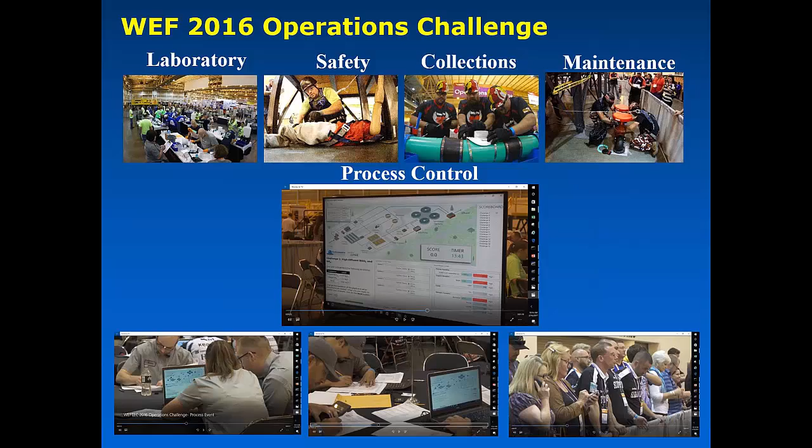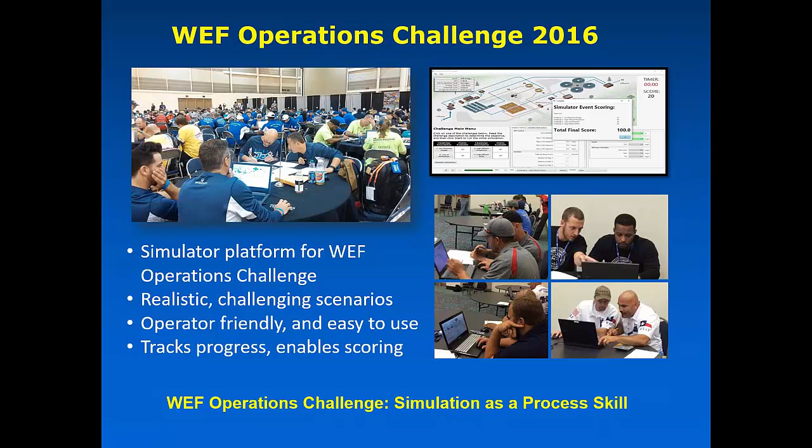So as we indicated earlier, the Operations Challenge event, the goal there, as the WEF committee presented it and as we've interpreted it, is not just to provide a simulator platform that allows us to have a realistic scenario in the Operations Challenge event. What we want to do, and will continue to strive to do, is make sure that those scenarios are as realistic and as challenging as possible. We continue to work on making sure that the simulator is operator friendly and easy to use. And again, we'll continue to solicit your feedback in terms of how you're engaging with the simulator.

So the first thing we'll do as we go forward is, for a number of you, the last time you worked with this was during the regional events last year. For those of you who made it to WEFTEC, you certainly worked with the simulator at WEFTEC. But what we'll do very quickly is have a very high-level overview of the simulator.

So when you open up the simulator, the key things that you will find is, first of all, the entire simulator itself, if you recall, is a clickable diagram. As you click on different objects, those objects will open up in this middle panel, and you will then be able to make any data input changes, any variable changes that you want. Item number 2 here is an operational summary. Every time you run the simulation, you'll be able to see the impact of any variable changes in this initial operational summary.

A number of you might notice that we have another additional operational summary in item number 3. What item number 2 does is it gives us things like the MLSS, the DO values, the total airflow, sludge production, and now we've introduced clarifier loadings, both the clarifier loading to the primary and the secondary clarifiers, and here we're talking about the hydraulic loading to the clarifiers. And then in the second operational summary, this is where we summarize things like SRT, the food to mass ratios, and the percentage removals of all the different loading variables. So percent BOD removal, percent total nitrogen removal, percent ammonia removal, and things of that nature.

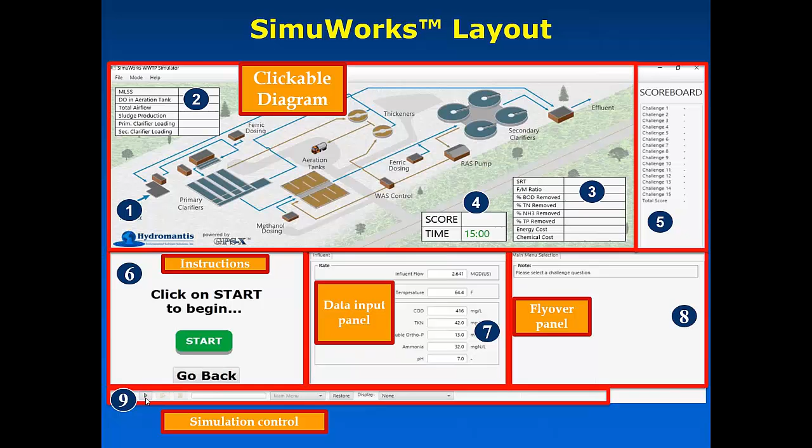So there are 4 quick things that we should recall and keep in mind as we go through the discussion. The first one is we have to click on any unit process that we're interested in on the plant diagram itself. Once we make that click, we can go in and make whatever parameter changes we're interested in making. And then once we've done that, we run by clicking on the start button in the bottom left of the simulator, and then we observe the results.

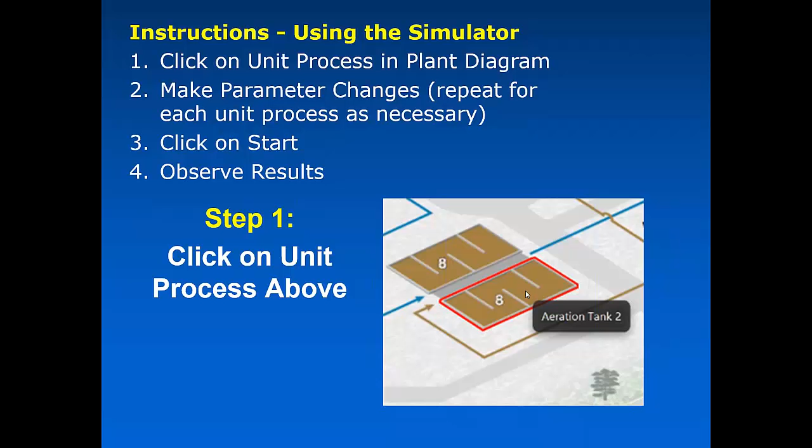So step 1, click on any unit process that we're interested in. Step number 2 is we go ahead and adjust the parameters of interest. So for example, in this case, we clicked on the aeration tank, and now we have the ability to go in and make changes to the DO controller, or we can utilize an airflow.

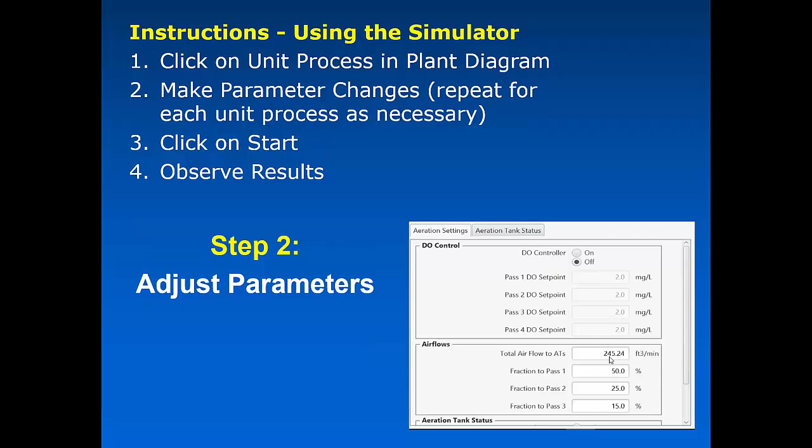And then step number 3, this is where we hit the start button and it runs the simulation. What it means is that every time we hit this run, it takes all the variable changes we've made. So if we change DO from 0 to 2, once we hit this button, it makes that change and allows us to incorporate that change into what is going on in the plant, and we then get results.

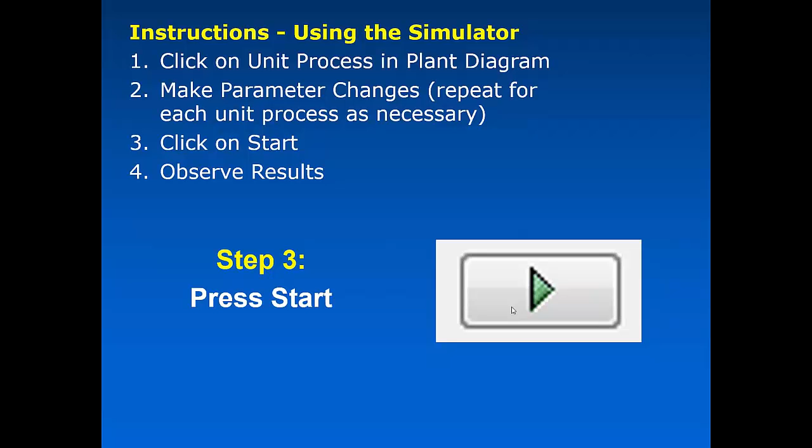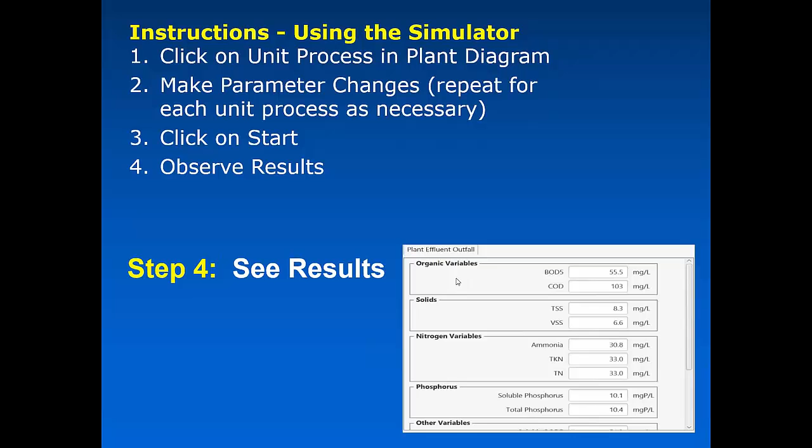And the final stage obviously is we can then see the results and determine whether those results are the things we're looking for. And if they are, then we're fine, we've met the challenge requirements. If they're not, it means we have to go through that process again in an iterative fashion.

So overall, there are about 15 questions that we had for the WEFTEC challenge. Those questions addressed a number of very different issues. So the first question was about a high effluent COD situation. It's a plant where we're not meeting the COD targets and we need to bring that into compliance.

There are questions like question number 3 that had to do with trying to meet a total Kjeldahl nitrogen, so a total organic nitrogen, which essentially means in most cases we have to do both nitrification and, as we will see in challenge number 3, we also had to think about some denitrification as well. And in the meantime, we have to do that in the context of trying to stay within an energy limit in terms of cost. There are questions that addressed issues of seasonality.

So question number 4 had to do with a cold weather type situation. There are questions around total phosphorus removal that would push us into considering things like chemically enhanced phosphorus removal in case the biological process was not sufficient.

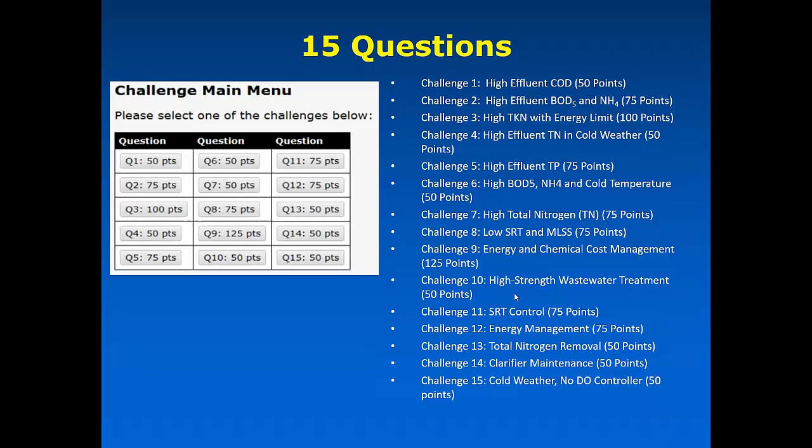There are questions around, like question number 9, where we're looking at the regulatory requirements, which is your BOD, your total nitrogen, your total phosphorus, but at the same time, this plant needed to also do all of that within the constraints of trying to meet specific energy and specific chemical cost management goals. So again, a variety of different types of challenges. Like challenge number 10, for example, this is one in which we're dealing with a high-strength wastewater, presumably a plant that has a pretreatment program where industrial facilities are discharging somewhat higher concentration wastewaters.

Before we go on, very quickly, one of the things we need to talk about as well is what the calculation basis is. So the MLSS that is reported in the simulator is actually the mixed liquor suspended solids from the effluent of the aeration tank. So if you look at the aeration tank, you will see that there are partitions. This aeration tank actually has 4 separate zones.

So this is the first pass, the second pass, the third pass, and the fourth pass. So the MLSS value is read from that fourth and final pass in the aeration tank. The SRT is defined as the total mass of solids in the bioreactor divided by the mass of waste-activated sludge. So this is where our WAS is coming from. So the total amount of wasted sludge in pounds per day is the denominator there, and then the total mass of solids in our aeration tank is the numerator. So that's the mass of solids.

The DO in the aeration tank is reported at the end of the aeration tank. So if we see a DO level of 2 up here, it would mean that's the DO level in the final zone. And as we go through, I will remind you of what we need to do if we were using, for example, the airflow rate, and we wanted to know what the implication of that airflow rate is for the DO levels in the different zones.

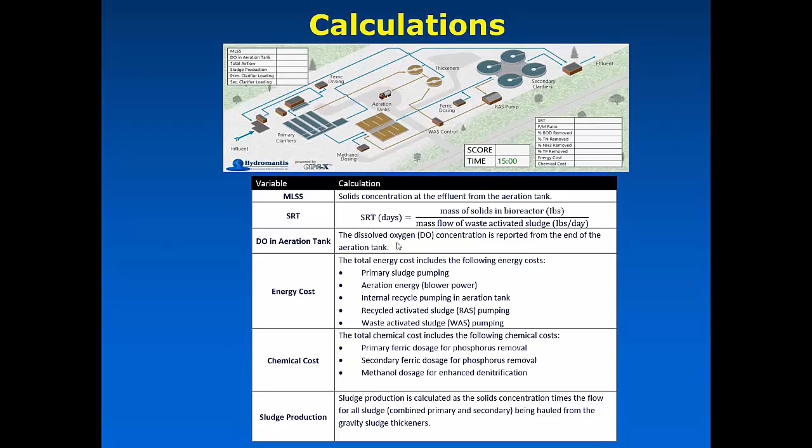Why does that become important? There are going to be questions where we may turn off a number of clarifiers, and it's up to you to decide whether you want to bring some clarifiers online or you want to take them offline in order to meet certain targets. There might be questions where just understanding what food to mass ratios might be optimal would be useful in helping to determine whether one needs to bring on board another aeration tank, or whether you might want to bump up the mass, which is the MLSS, in order to push the food to mass ratio down. So it's worth noting these as we go into the questions.

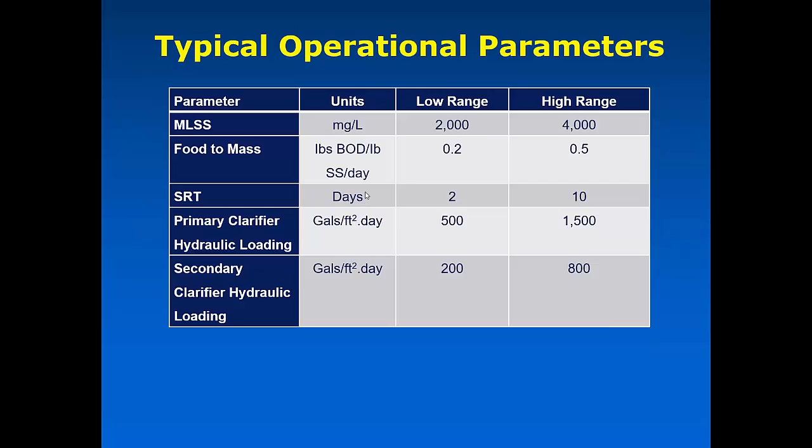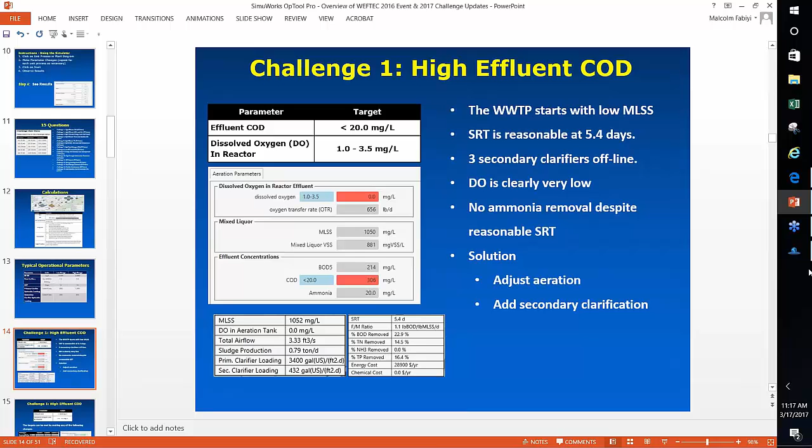So what I'll do right now is I will segue into the simulator itself. What I've done is I've turned off the timer so that we don't have to deal with that particular issue. We're going to take as much time as we need to just work ourselves slowly through the presentation. And so these are the 15 questions that you were faced with at WEFTEC.

The first question was one in which this plant had to deal with a high effluent COD. As soon as you open the question, the simulator has already solved for the first case, and what we can see very clearly is that right now we're not meeting any of the goals. If I click forward, the goal for this particular project is for us to have an effluent COD that's less than 20. Right now our effluent COD is about 306, so we're not doing anything at all in terms of COD removal. And we have a DO target. That DO target is between 1 and 3.5, and right now the effluent DO is at about 0.

If we look at the summary, we can see that our MLSS is a little bit on the low side. 1 aeration tank is offline. 3 clarifiers are offline.

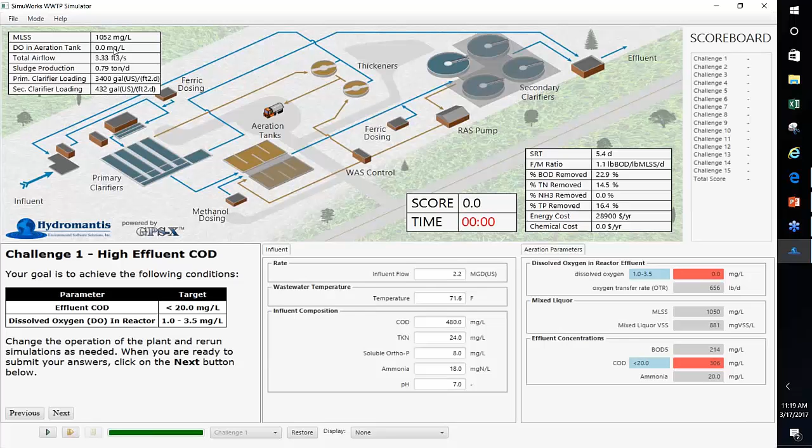And if we look at the food to mass ratio, we can see very clearly that it is almost twice what we were suggesting might be your upper bound. So it's about 1.1, which seems to be quite high as well. So perhaps the first thing we'll do in this plant is go ahead and turn on aeration. We know we don't have any aeration, or rather we have very small levels of aeration. How do we determine exactly how much aeration we have?

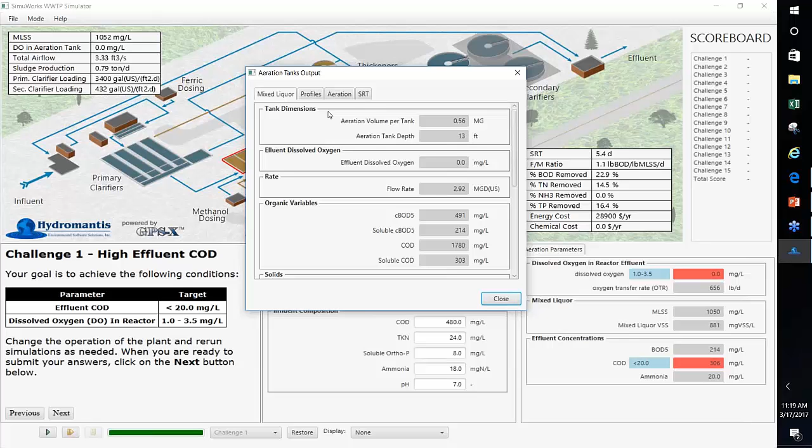We can go to the aeration tank, right click on it, and then go to outputs. And if we go to aeration, it will show us that the 0 average actually comes from the fact that in each of these different zones we have very, very low levels of aeration. So the first thing we'll do, because it's really easy to do, is we know we have a DO target, so let's just click on the aeration tank.

The middle panel opens up the DO. We know we need to keep within a DO target of 1 to 3.5, so let's just turn on the aeration and put in DO levels of 2. That's well within the target range. Go ahead and run that simulation. We've now met that target.

The key question now is that the COD levels have come down. We're now close to 20. We're at 24.5, but we're just not quite there yet. What else can we do? Well, one thing we could certainly easily do is bring one more clarifier online. We click on the clarifiers, the middle panel opens up the clarifiers, and we just turn one more clarifier on and run the simulation, and that allows us to meet the targets.

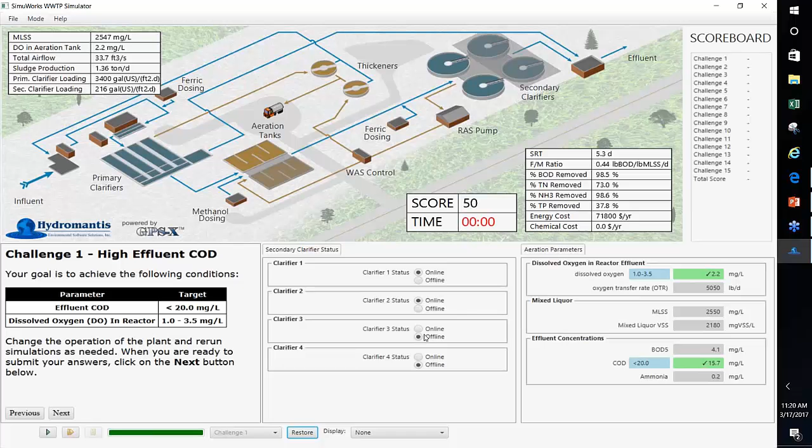So we click through next. We submit an answer. We go back to the main menu, and now we're going to go into the second question. The second question is one in which we're dealing with a plant that has a high effluent BOD and ammonia.

Several things to note about this particular plant. The first iteration that the simulator has gone through is one in which we have very low levels of MLSS. The food to mass ratio is very high. So what that tells us is we certainly want to bump up the denominator, increase the mass of solids in the process. The BOD removals are quite low. Ammonia removal is not happening at all. We can see that our DO level is non-existent. So there are a number of things that we have to do in this particular plant.

So the first thing we'll do is bring the second aeration tank back online. There are a couple of ways in which we can bring units back online. One way is to click on the unit itself, in this case the aeration tank, and go to aeration tank status. We can click on here to bring it online. So we'll go ahead and do that. We brought it online. We run that simulation. Not much has changed.

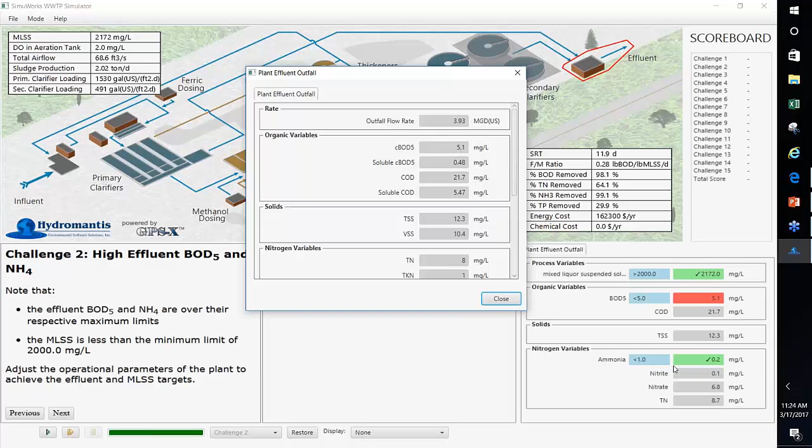We can see we have a TSS of 12.3, a BOD of 5.1. What we'll quickly do is bring one clarifier online so that we can reduce that TSS level, potentially even get better BOD removal, because part of that BOD value is associated with some of those solids.

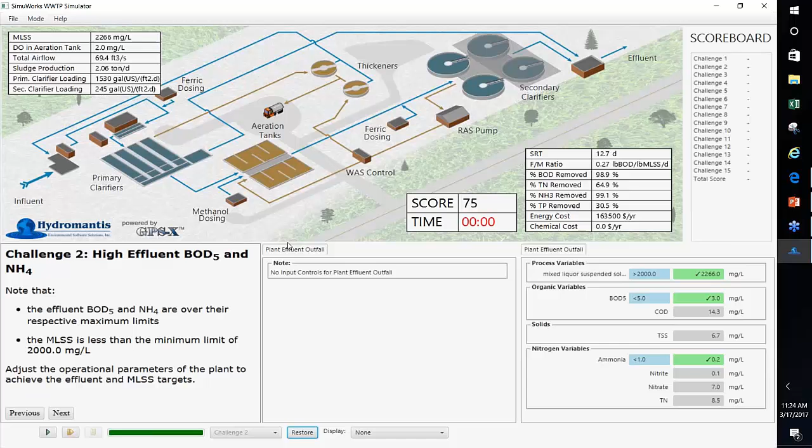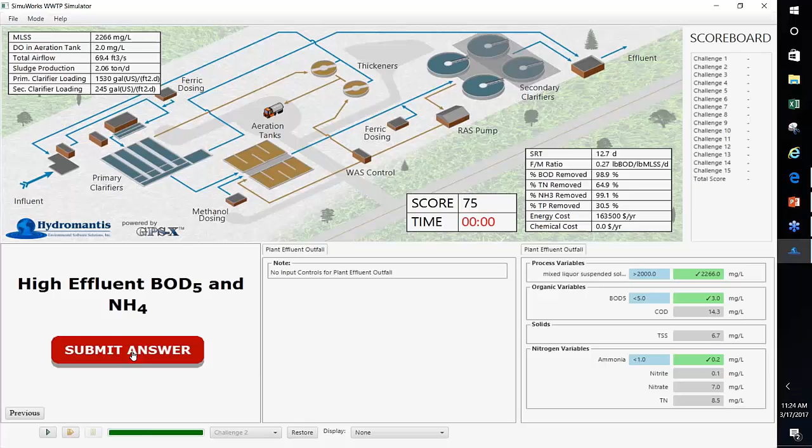So now that we've put 2 units online and brought the aeration tank online, we have good levels of MLSS. Aeration is sufficient in the system. Now we've met all the targets. We can bank the scores in this case, submit our answer, and then go back to the main menu.

The third case, so I'll just quickly check in through the questions.

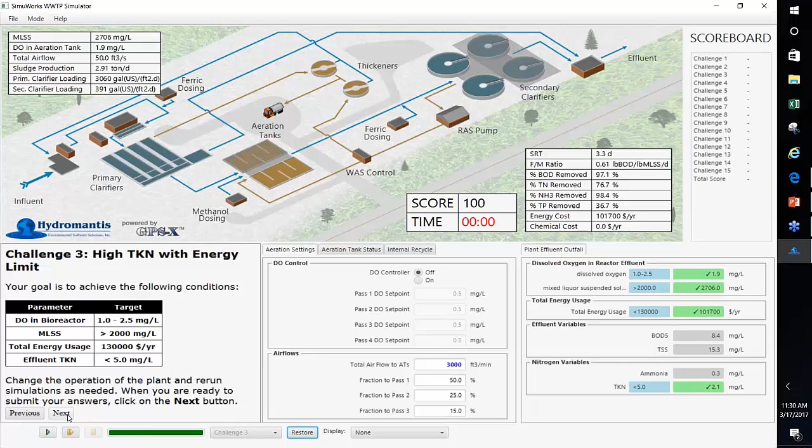So taking the aeration levels down allows us to meet the DO target. We're able to meet the mixed liquor target. We're able to stay within the total energy usage requirements in the plant. And from a TKN perspective, we're able to achieve both ammonia reduction and overall TKN reduction. So we've resolved that particular challenge. We can cycle through, submit that answer, and go back to the main menu.

I see a question, so let me just quickly take a look at the question we have.

Will this presentation be archived? The answer is yes, it will certainly be archived, and we'll make sure we have it available to you. The reason why we're not making it available yet is that there is an update that we'll talk to you about of the new challenge questions that are coming through. That release is going to be in a couple of weeks. Certainly by next week you should have the trial, the test version of the challenges for 2017 out.

Until that's done and the questions that go with that are set, we just want to make sure that this particular challenge that focuses on what was done last year, and that is in some ways related to some of the things that folks are doing right now, is not out there floating around. So everybody will have this in a couple of weeks, and we'll make sure you're all aware of that once it's released.

So the next thing we'll deal with is question number 4. In question number 4, the challenge we have here is that the plant has a high effluent total nitrogen. So the total nitrogen goal is to be less than 6. Right now we're at about 23.9, so almost 24. But the additional issue we're dealing with is that this is a cold weather situation. So we're dealing with seasonality.

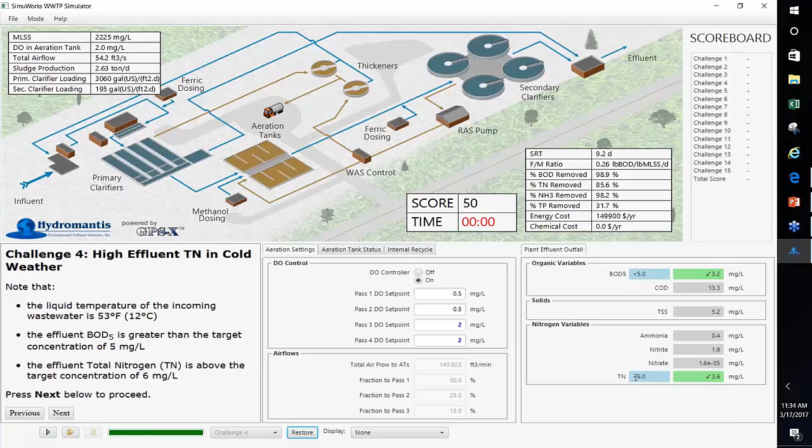So that was sufficient. We have enough aeration to make sure that we're nitrifying fully, and you can see that the ammonia levels are now at about 0.4. But by creating these anoxic zones in the front end, we're able to also ensure that we are denitrifying as well. And that allows us to meet the total nitrogen limit in the plant right now. So we'll take those results, we'll go ahead and we'll bank them, and then we'll go back to the simulation and we'll go to question number 5. So question number 5 is one in which we are dealing with a high effluent total phosphorus level.

The influent loading is similar to what we had in the previous one. So this is also still a cold temperature situation. It's 4 mgd on the influent. The temperature is about 53 Fahrenheit. That's what we're dealing with.

So the first thing we'll do is the DO level is a little low. The MLSS is about 2900, which is not too bad. But the first thing we're going to do is let's just turn all these units back on. So I'll turn on the aeration tank. We'll go to the clarifiers and turn all those units back on, and then run the simulation. So that's sufficient to allow us to meet this TSS target.

Remember that part of the goal we have, so we have 3 goals. We need to meet a TSS target. We need to meet an effluent total phosphorus target. And right now we're way off on that. And then we also need to make sure that the chemical dosage cost is where it needs to be. As we look across the plant, we'll see that the MLSS seems to be reasonable. We're meeting the TSS limits. We don't quite have a BOD target. We are not meeting the total phosphorus target.

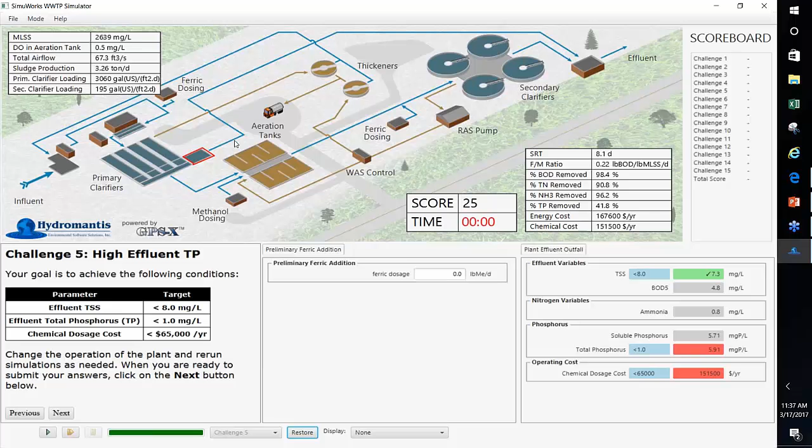So what we're going to do is we're now going to try to use a chemical step to address the phosphorus issue. There are 2 places where we can dose ferric to help us with phosphorus removal. We can do that in the front end ahead of the primary clarification system, and then we can also do that at the back end ahead of the secondary clarifiers. A lot of plants will do one or both. So we'll do a little bit of both. Our current TP level is at 5.91, so let's add about 100 pounds in the front end.

So from 5.91, let's see where that gets us. We run the simulation. That gets us down to about 4.79. Let's go ahead and dose about 100 as well to the back end. Run that simulation. That gets us down to about 3.18. Let's again go to the front end. It looks like every time we add about 100, we're removing somewhere in the 1 to 1.5 milligram per liter phosphorus range. So let's bump this up to 200 in the front end. Now we're at about 1.7, and we would expect that if we bump this up by another 100, that should hopefully get us where we need to be. So doing that gets us to where we are looking to be.

The challenge, though, is we're certainly not meeting our chemical dosage cost. And you'll notice that when we added that last bit of ferric dosage, we also went out of whack in terms of TSS. One reason why that might have happened is because as we increased ferric dosage, the MLSS levels also went up. We're forming more ferric precipitate. So the phosphorus is precipitating as a solid. It's part of the MLSS. We're sending more solids to the clarifier.

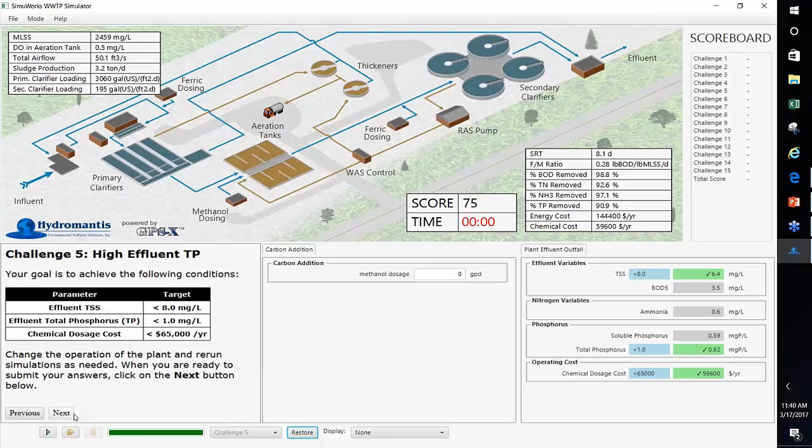and now that helps us meet all of our targets. By removing that methanol, we're removing some COD. That COD was being turned into MLSS. It was consuming some oxygen. It was increasing the solids concentration, increasing solids load into the back end, and by just removing that, it addressed both the cost issue as well as helped us shave off some of the solids in the system, which brought the TSS in the effluent down. So again, this is an example of these interrelated things that we have to deal with in the context of wastewater treatment. So let's bank that answer and then go back to the main menu. So right now we'll go to question number 6.

Before I do that, let me take a quick look at the questions. So the question was, are points deducted each time you press play? The answer is no, points are not deducted. Each time we press play, the system simulates, and the only points that we get are whatever points are scored here. So you can make whatever changes you need to make.

You can add variables, remove variables. All that's important as far as the challenge is concerned is for you to do what you need to do within the time limit that is allotted. How you do it, what changes you make, and how often you do that, there's no penalization for that at all. All right, so please keep the questions coming. I will be addressing them periodically as we go on.

The next challenge is one in which we have a plant where we're dealing with a high BOD situation. So the BOD is 114. The target is to be less than 10. And ammonia, we want it to be less than 1. Right now it's 27.4. In terms of the influent, the temperature is still low. The influent flow is about 4.

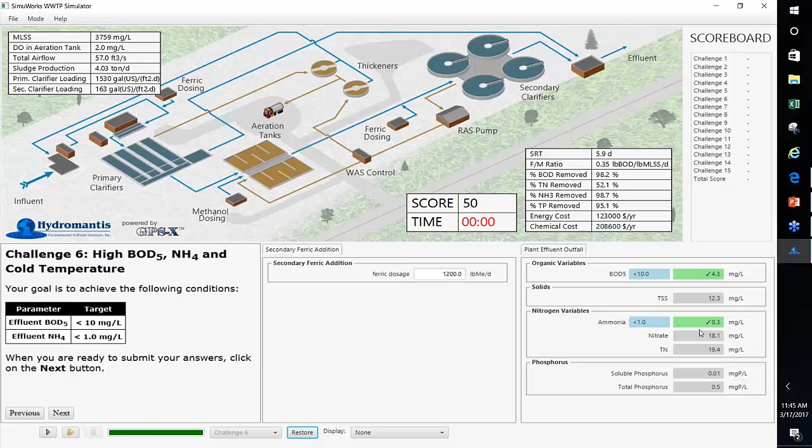There's no additional goal that we have. If there was a chemical cost goal, we can go ahead and begin to shave even more ferric from the back end. But we've met the challenge requirements in this case. We can just go ahead and bank those answers and then go back to the main menu.

So the next question, question number 7, is one where we're dealing with a high total nitrogen. In this case, the total nitrogen target should be 8 or less than 8. Right now, it's about 17.5. We also have a chemical dosage cost target. So we want to make sure we can meet the total nitrogen target while at the same time keeping within a certain cost in terms of the chemical dosage costs.

So what we'll do is, as we look through, we have a number of units offline, so let's bring those units back in service. Click on the clarifiers. Let's use the alternative way of bringing those clarifiers in service. So we've put all those units back in service. We are still not where we need to be. If we look quickly, we have an SRT that is at 3.2 days.

MLSS is still quite low. So one of the things we certainly want to do is bump up this MLSS value, which should also help us bump up the SRT value. Right now we're wasting about 100,000. Why don't we just take that down to about half so that we can almost double both the MLSS and the SRT. We'll go ahead and run that simulation. We're certainly not even close to where we need to be.

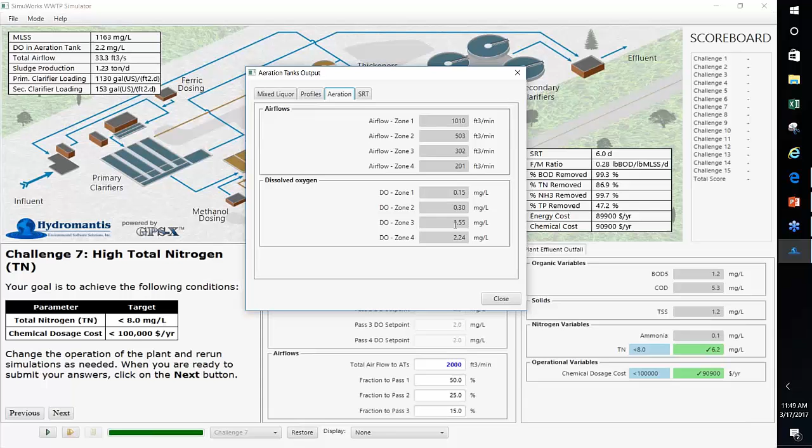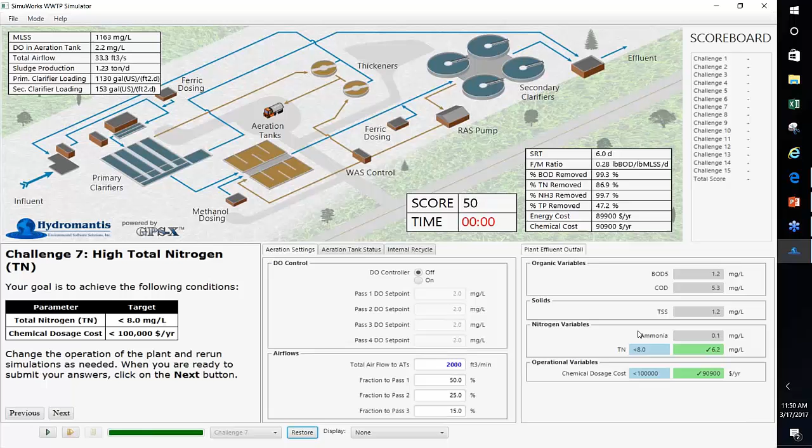But if I right click on the aeration tank and go to outputs and then aeration, you will see that even though we're leaving zone 4 with about 2.2 milligrams per liter, both zones 1 and 2 are very nicely anoxic. Those DO levels are between 0 and 0.5. Those are the types of DO levels you're looking at in order to create a nice anoxic zone. So I'm nicely anoxic in those front-end zones, and that allowed me, even though I pulled back on methanol, to actually create an environment where I could use some of the soluble COD available in the front end of the plant to help me with denitrification. So we'll bank those answers and cycle through very quickly to question number 8.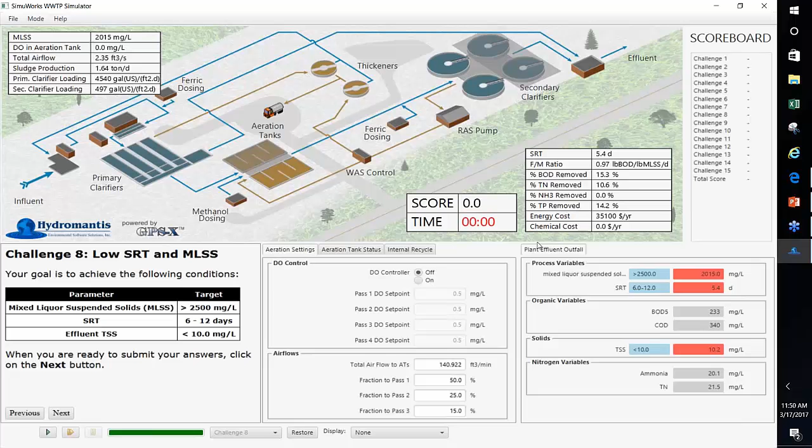This is a question where we're dealing with a low SRT and MLSS situation. In terms of targets, we want a minimum MLSS of about 2,500, an SRT within about 6 to 12 days, and an effluent TSS of about 10 or less. Right now, our MLSS is about 2,000. Our SRT is about 5.4 days. In terms of the influent, it's 5 mgd. The temperature is about 72 Fahrenheit. But let's just bring all the systems back in service so that we're not limited in terms of that. Let's run.

And just bringing all the systems back in service actually helped us to meet quite a few of our goals. It helped us to meet the TSS goal. And right now we are just on the verge of meeting the SRT goal. That could still change, but at least now all the systems are back in service. The next thing we'll do is we can see that our DO level is low. So maybe one thing we will right away do is let's turn on aeration.

We're still dealing with that TSS issue. The TSS is high, but we can also see that our MLSS seems to be on the slightly higher side. And we can actually pull back a little bit on the MLSS and still stay within range on the SRT. So we'll go to WAS control and we will increase. So right now we're wasting about 22,000. Let's bump that up to maybe about 40,000 so that we can bring that MLSS down close to about 2,000.

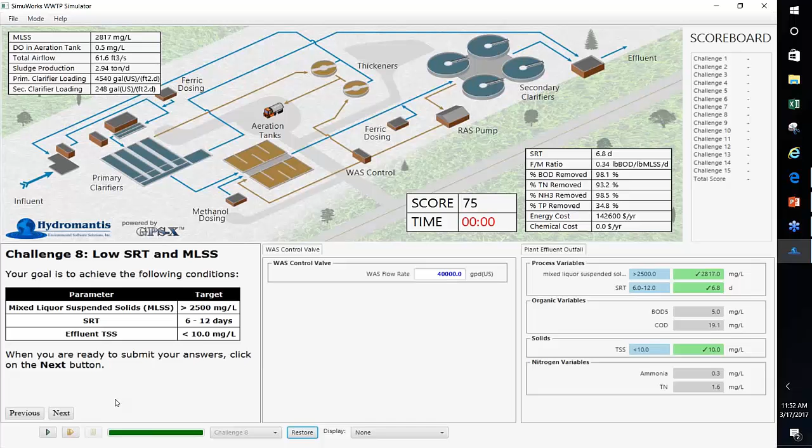So now the MLSS is at the target. We wanted it to be greater than about 2,500. It's now about 2,800. The SRT is well within range, and then our TSS is also just at the point where we want it to be. We can go ahead and bank that.

And then we'll go back to the main menu and we'll go to question number 9. So this was the highest scoring question, for obvious reasons. We're dealing with both energy and chemical cost management in this particular question. And if we look at the plant itself, we have a TSS target, we have a TKN target, we have a TP target, and we also have an energy cost target.

So the first thing we'll do, if we look at the operational summaries, our DO level is quite high. That immediately tells us we can actually optimize aeration. The MLSS seems to be somewhat reasonable. It's below that kind of 2,000 range, but it's still somewhat reasonable. Our SRT is quite low. So if we intend to do anything with TKN removal, we need to take a hard look at this SRT, because we need a reasonable SRT in order for us to do nitrification. And right now we're not doing any nitrification. The ammonia level is about 23. TSS levels are quite high.

So let's just go ahead and quickly put all the systems back online. So we'll put all the clarifiers online, put the aeration tank online, go ahead and run the simulation. Bringing everything online helped us with the nitrogen and the phosphorus targets. Now we have to deal with the energy and the TSS issue. So one of the things we'll do is let's go to the DO controller. And perhaps what we'll do is let's turn on the DO controller. Let's leave the default variables in, and let's just run and see what impact that has.

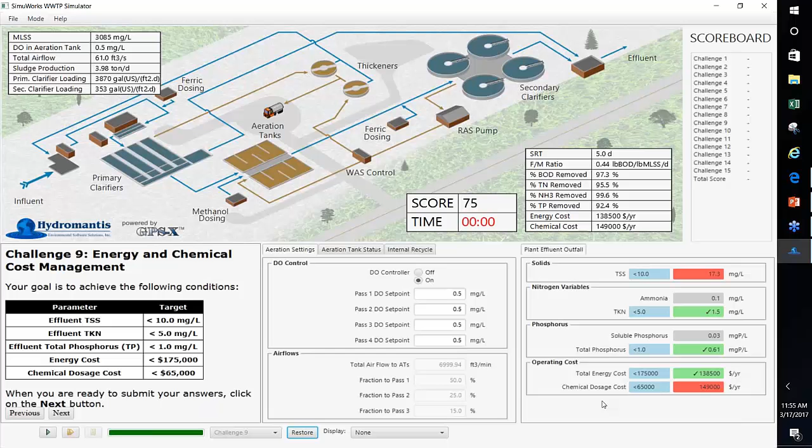So that helped us with the energy cost. We're still fine in terms of TKN. The total phosphorus is still reasonable and decent. Both aeration tanks are online. All the clarifiers are online. The issue we're dealing with is that the TSS level is somewhat on the high side. The chemical dosage cost is also quite high.

So one of the things we're going to take a look at is whether there's anything we can do in terms of chemical dosage. So the options we have are the ferric. There's nothing in methanol, so the only thing we can do from a chemical dosage cost is actually on the 2 ferric dosage sites. Right now the cost here, we need to be at 65,000. This is almost 150,000. So that's certainly more than twice where we need to be. So let's go ahead and dial back on both chemical dosage points. If we're to get anywhere near the target, we need to be dosing only about 200 and not 500. And then let's see what the impact of that is on the plant operations. And then we can begin adjusting from there.

So we've met quite a few of our requirements. The only requirement we've not met now is the TSS requirement. It's still a little bit on the high side. So what we'll do now is we'll just essentially use perhaps waste activated sludge control to perhaps reduce.

So if we look at the secondary clarifier loading, this seems decent. This is the hydraulic loading, so the amount of flow going. It doesn't tell us about the amount of solids going to the clarifier. So the solids are determined by the MLSS. What we want to do is maybe dial back a little bit on the MLSS by increasing the WAS flow.

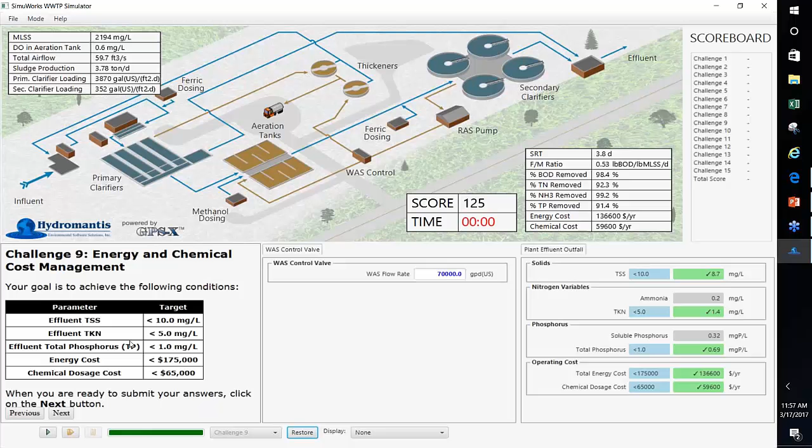We go ahead, we submit that, go back to the main menu. So that was question number 9. And now we'll go to question number 10. So I'll just quickly pick up the pace here as we near the 1 hour mark.

So the challenge here is it's a high strength wastewater. And if we click on the influent, we'll see that it's 5 mgd. Temperature is about 72 Fahrenheit, but the COD is quite high. So this might be something that a plant would experience if, for example, as I indicated earlier, a facility possibly has a pretreatment program, and there might be some industrial influents that are coming into the plant.

So the first thing that we will do is all the systems are already online. The DO seems fine, airflows are specified, the SRT seems fine, the F/M ratio is 0.61, slightly on the high end, but you know, it's well within range. So let's go ahead and just click forward to see what the targets are. So the target here is we have an airflow target. We've been told the airflow is going to be at or just less than 3,500.

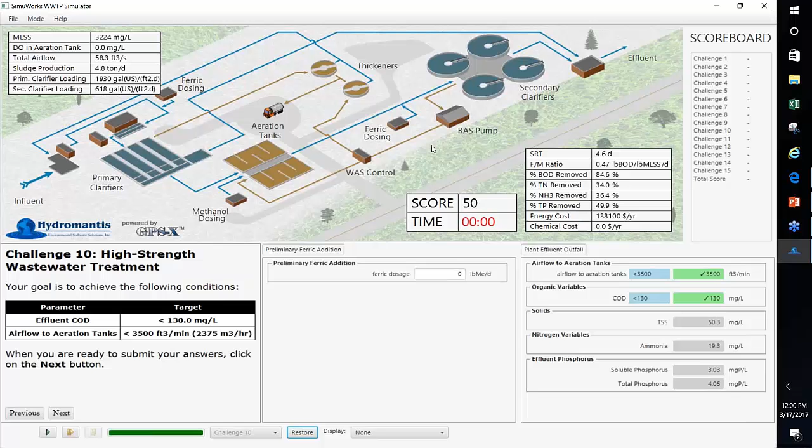Well, taking off all the ferric allowed us to meet the effluent goals in this case. We could have certainly also met those goals by perhaps adjusting the WAS rate to reduce the MLSS a little bit so that the solids load into the clarifiers could be reduced somewhat as well. So we'll bank that question. That's been answered. We'll go to question 11. So I'll just pick up the pace here. So here the target is SRT control.

We see that the MLSS is quite low. We have no DO, no reasonable levels of DO in the system. 3 clarifiers are offline. So the first thing we'll do, this is about SRT control. This is about solids. I want to make sure I have all the clarification capacity that's available. So I turn on my clarifiers, run,

and the next thing that I'll do is just go ahead and make sure we have aeration. Turn on the DO controller, leave it at the defaults, go ahead and run that and see where it gets us. So we're able to meet the BOD target by doing that. We still have a number of targets. There's an SRT target, there's an effluent phosphorus target.

If we look at the soluble phosphorus, it's at 6.6 right now. We need it to be at 0.1. So let's go ahead and dose ferric to both the front end and the back end. Right now we're at about 25. Let's bump that up to 200 first. Let's run that. So now we're at 6.6. Let's see where that gets us. It takes us from 6.6 to about 4.

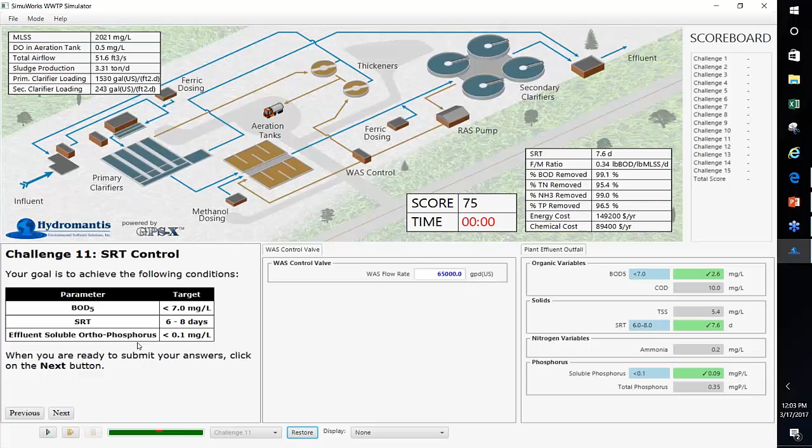The easiest thing we can do, we're at 10.5. We want to waste more sludge so that the SRT comes down. So from 45,000, let's just make that 65,000. And that allows us to go to an SRT range that is well within where we want the plant to be. So we bank that, submit that answer, go to the main menu, and now we can go to question

number 12. This is an energy management question, and in this particular challenge we have 3 goals. We want a BOD that's less than 10, we want a TKN that's about 3, we want total energy to be no more than 190. This is also one of those situations, if we click on the influent, where the temperature is low. So we have to do all this in the context of a low temperature situation.

So the first thing I certainly want to do here is bring all my units online. We need all the help we can get. So we bring all the units online. We run the simulation. So that's sorted in terms of making sure all the units are online. But we have an energy target, and most of that energy is likely to be coming from the aeration. So right now, if we click on the aeration, this is about 6,000. We can dial back on that a little bit, make that about 4,500. That reduces the energy cost somewhat. We're still not where we need to be.

There's still some work to do. So where is our energy cost coming from? If you recall the table we discussed at the beginning, energy comes from the WAS control. So maybe there's something we can do with WAS. Energy comes from the RAS pumping, and energy comes from the aeration tanks. We've adjusted the aeration. We're pretty low with aeration. It doesn't seem like there's much more we can potentially be doing here.

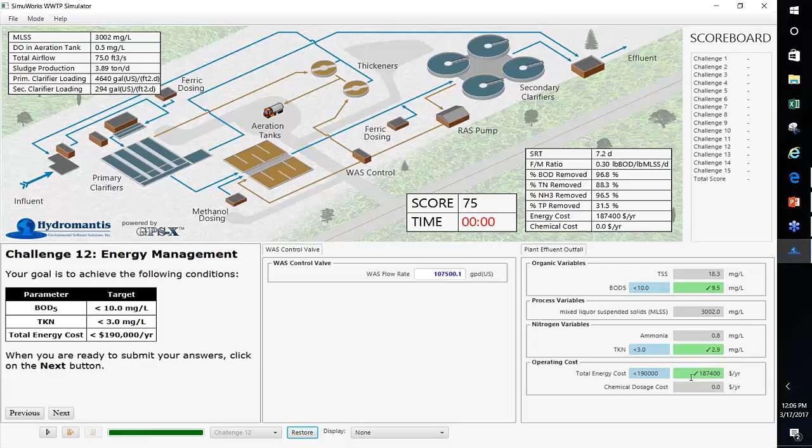So by increasing the RAS rate, the WAS rate rather, bringing down the MLSS, shaving the aeration to meet the TKN target as well as the total energy cost, we're able to meet the challenge requirements there. So let's bank that answer quickly.

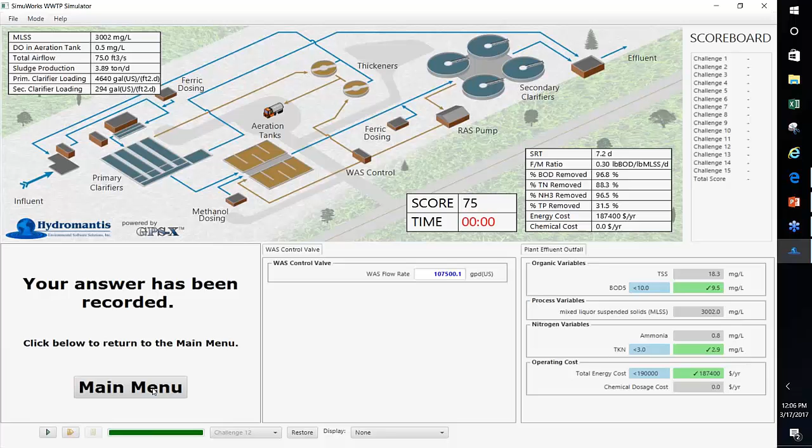Go back to the menu. That was question number 12 and question number 13. Here, the goal is total nitrogen removal. First thing we'll do, let's put everything back in service. Run the simulation.

Our goal is we have a total chemical cost goal, and we need total nitrogen to be less than 10. Right now, total nitrogen is quite high. You can see that we're doing a good job of ammonia removal. So that's not our problem. Our problem right now is denitrification. There's a lot of nitrates in the system.

So what we'll do is we'll go to aeration. We can see that we don't have an anoxic zone. So the first thing we want to do is let's create an anoxic zone and see how that impacts. Well, we have an anoxic zone. We didn't see much of an impact. The chemical dosage cost is just slightly higher.

Chemical dosage tends to come from both our ferric, there's no ferric here, in the back end. There's no ferric in the front end. And if we look at methanol, well, we have methanol here. Let's see if shaving, we just need this chemical dosage cost to be less than 75,000. We need methanol because we're trying to do denitrification. So let's see where this gets us. We've met that methanol dosage. We cannot go higher in terms of methanol because that's the only chemical cost.

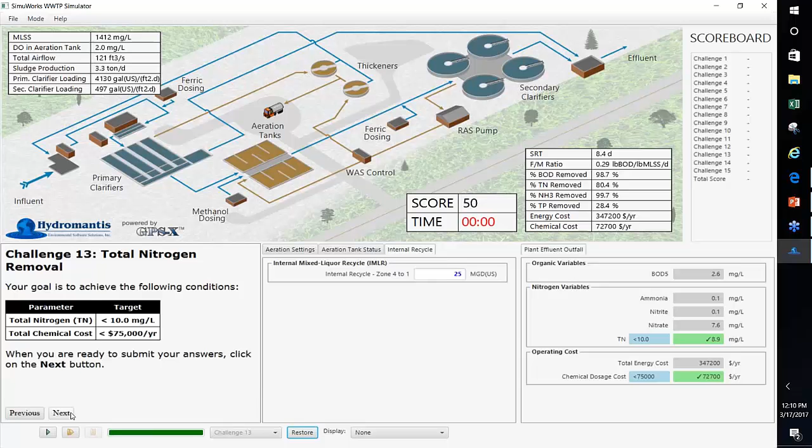Typical values are somewhere between about 1 to 4 times your influent. Right now our influent is 8, so 4 times our influent is 32. Let's just go ahead and make this about 25 in terms of that internal recycle flow where we're moving nitrates from the back end to the front end. And just doing that allows us to leverage the biological process to do denitrification. A lot of you that have internal recycle streams in your aeration systems, that's actually the principle of what's really going on. You're trying to move nitrates from that back end with a lot of nitrates to the front end where you have a lot of readily biodegradable COD and already a low nitrate environment.

Question 14, we're maintaining clarifiers in this case. What we're trying to do is to make sure that we meet a BOD target and an MLSS target, given the constraint that we don't have all our clarifiers available. A lot of plants would go through that, for example, during maintenance. If I click on the clarifiers, you will see very clearly that 2 are grayed out. I can't do anything with them. I can bring at least the one that I have available online, run the simulation and see what happens. I am still not meeting my BOD target. I am not meeting my mixed liquor target.

The next option that I see is that I have no dissolved oxygen. So let's go ahead and just provide oxygenation to the process. Let's run that simulation. Making oxygen available allows us to meet the BOD target, and all I need to do now is meet my mixed liquor target. I want to increase mixed liquor, so it will probably not serve me too well to bring on another aeration tank because that would make the MLSS lower.

So I'll maintain the single aeration tank, and what I'll do is just use WAS control to help me reduce. Right now I'm at 15,000 gallons per day. I need to bump up my MLSS by at least a factor of about 2. So what I'll do is take this down to about 7,000 from about 15,000, just a little over half in terms of reduction. I am close, but not quite close enough.

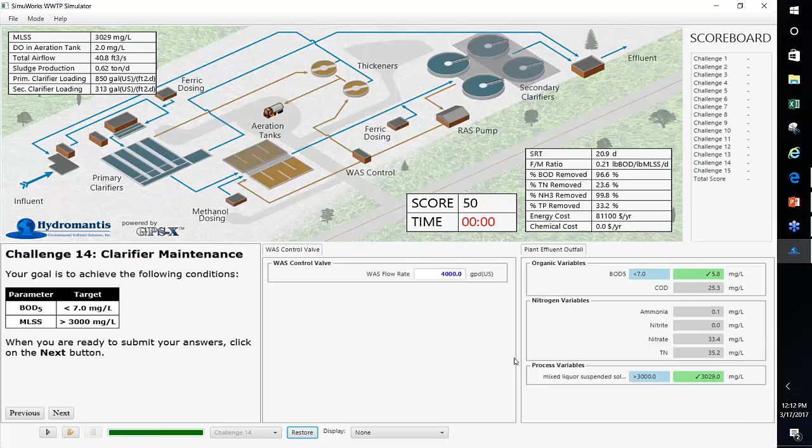Now at 2,500, I need to be at 3,000. Let me go ahead and shave this again, take that to 5,000, see where that gets us. I am close, not yet close enough. Let me take that to 4,000. And this should hopefully do it. So yes, we're now where we need to be, and we can bank that answer and go back to the main menu.

And now we're at the final question where we have a cold weather situation. We have no ability to control the DO. So we can't use DO control, but we want to control SRT, and we want our DO to be within a certain target range. So the first thing we'll do is click on the aeration tank,

right now we're at about 1,000, and the DO level is 0. If we right-click and go to outputs and look at aeration, we can see that the DO is really quite low. So let's bump that up, take it to about 3,000, see where it gets us. That puts us within a decent range where we want to be. The challenge we have, though, is we're still off in terms of SRT.

One thing we can obviously do in this particular case is the easiest lever we have available to us, the WAS control. By reducing the wastage rate, we can increase the SRT. Right now, our SRT is about half of where it needs to be. So what I'll do is just halve our WAS flow rate so that we're within the range of doubling the SRT. So from 80,000, let's go to 40,000.

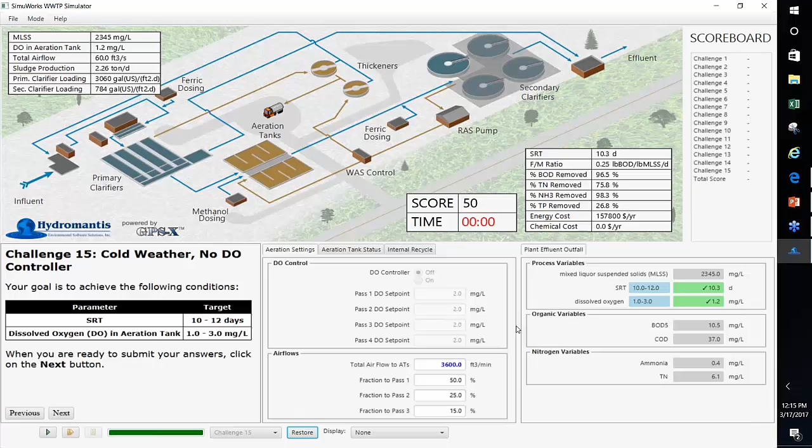And what happened? Well, our SRT is now slightly above 10, but our DO level also went down. When we reduced the WAS flow rate, our MLSS obviously went up, and now we're consuming more oxygen. So let's go back to the aeration tank and put in a little more oxygen. Let's run that simulation. Running that simulation, putting in a bit of oxygen, allows us to meet the DO target, and the SRT target as well. We go ahead and bank that.

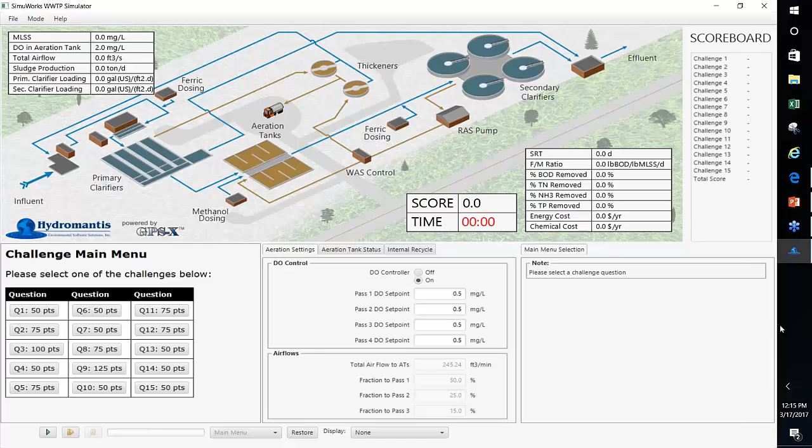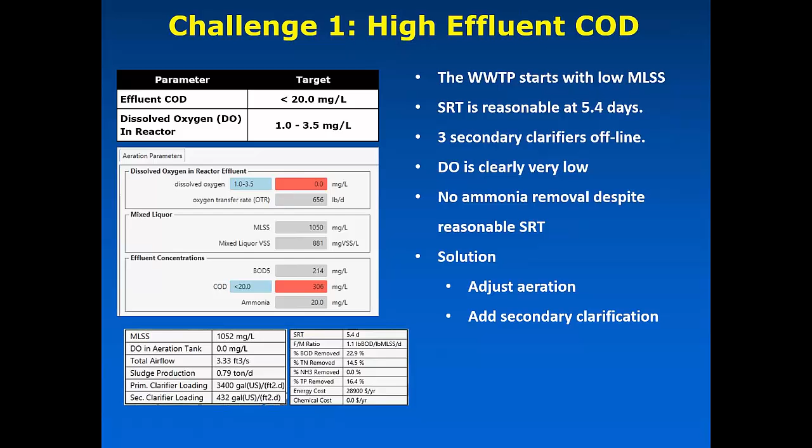So those are the 15 questions. I will just very quickly go back to the presentation. What you'll find going forward is we will post this presentation, and what we have in the presentation are the different challenges as well as some potential solutions. For example, for challenge number 1, there are a variety of solutions. You don't have one answer. There are no two plants where you have just one answer to a question.

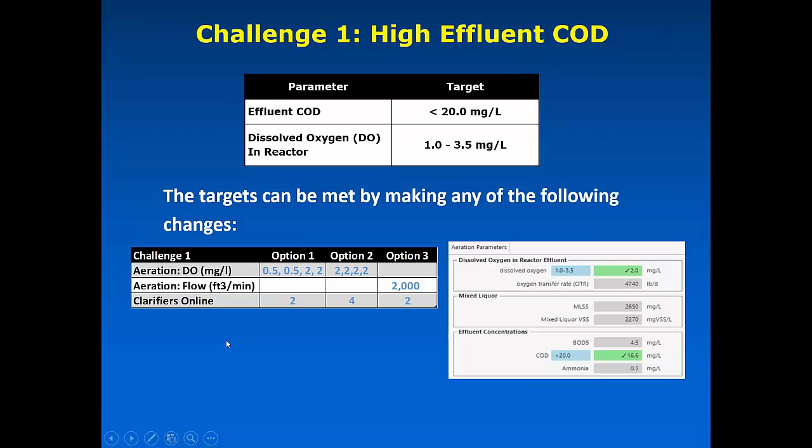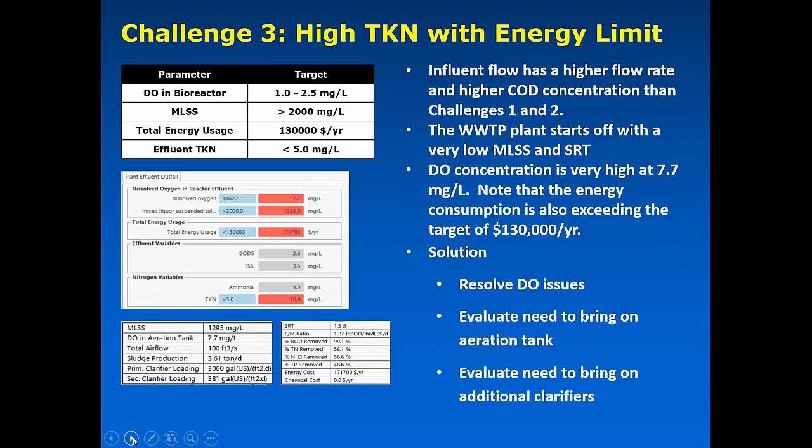So in this case, we're showing you 3 different alternatives that would have gotten us to meet all of the challenge requirements. And we do this for all of the questions. For every single question, so challenge number 2, these are 2 alternative options that also get you to the answer. Challenge number 3, these are 2 different options. In this case, we're using DO control. In this case, we're using aeration.

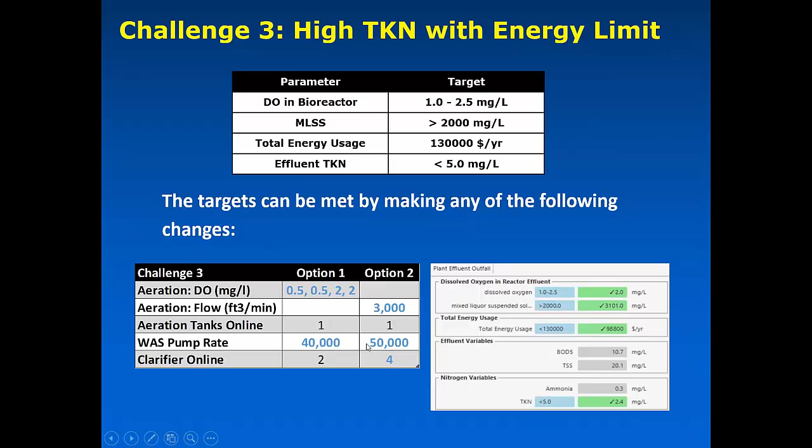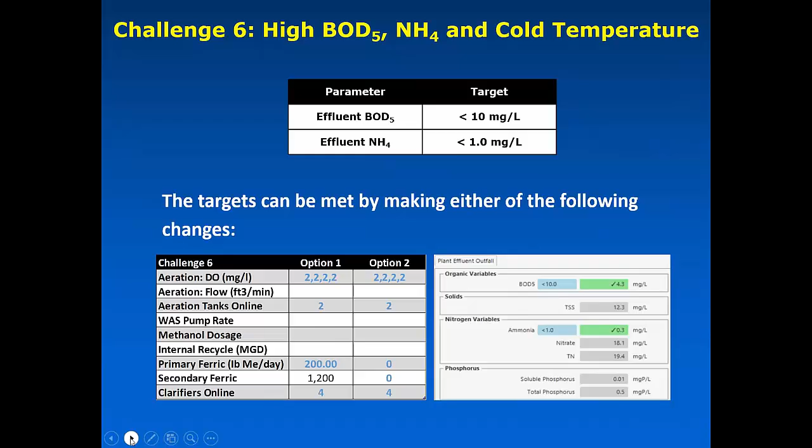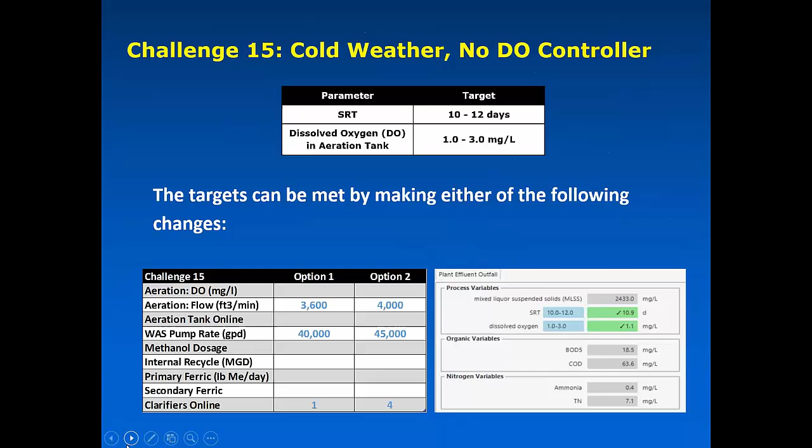In this case, we're bringing only 2 clarifiers online. In this case, we're bringing all the clarifiers online. In this case, we're wasting 40,000 gallons per day. In this case, we're wasting 50. So this is reflective of reality, that there are different strategies that can get us results. All of this is going to be available to you in a couple of weeks, and we'll let everybody know when that's available.

What I'll do now is discuss what's coming up soon and talk about how to access the simulator. There was a question about that. For the 2017 challenge, there are 2, maybe 3 major things that are coming. The first one is it's still a full plant, and by full plant we mean it goes from influent to primary preliminary treatment to secondary treatment. And now what we're adding this year is solids handling, so there's a digester, so there will be questions around digester operations.

There's also disinfection, and right now the only disinfection approach that we're using is chlorination. So there will be some challenges around chlorination. There will be some challenge questions around digester operations, in addition to the usual challenge questions about the plant operations in general.

We have expanded the operational summary. If you recall, last year we used to have just one high-level summary. Now we've broken it out into two. We've included things like the F/M ratio and the percent removals. Energy costs had always been there; we've just separated those and moved them apart. There's SRT, and then there's the loading as well, so that you can very quickly begin to determine whether your clarifiers are at a point where they are hydraulically limited or not.

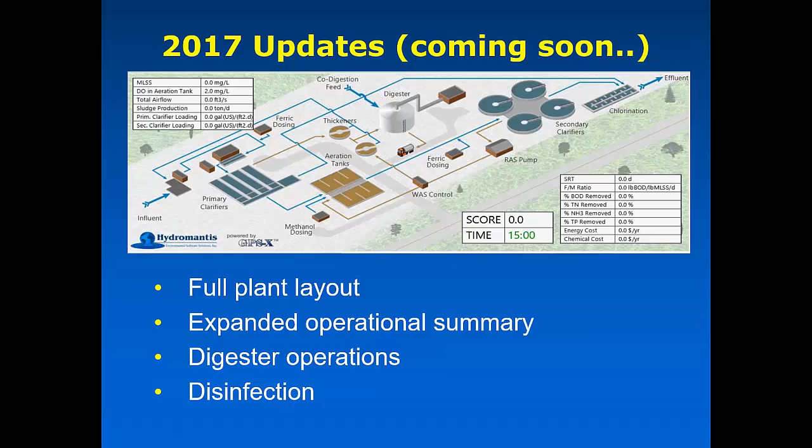And then we've had a number of people that have asked questions about the simulator. The first thing is that the simulator platform itself that you need to test for your tests and for WEFTEC is completely free. It's available online. I will show you the link right now. You can always send us an email or copy down the link when I show you what it is. Everybody that's taking the challenge, your teammates, folks at your plant, you can just reach out to us, send us an email, let us know it's about the challenge, and you can access this completely for free.

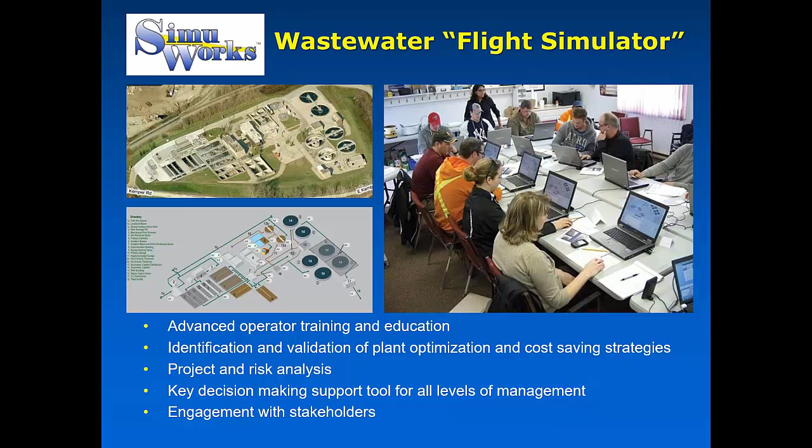There are, however, a number of you that have been asking us whether customized versions of the simulator could be available for your plants. The answer is yes. That's part of what we do. So for example, this is a wastewater plant. This is the bird's eye view of the plant. This is that plant replicated in SimuWorks. So you can see the clarifiers, the six of them, the front end, the back end. So this is that plant. It provides you with all of the things that the simulator allows you to do. It's just customized to your plants.

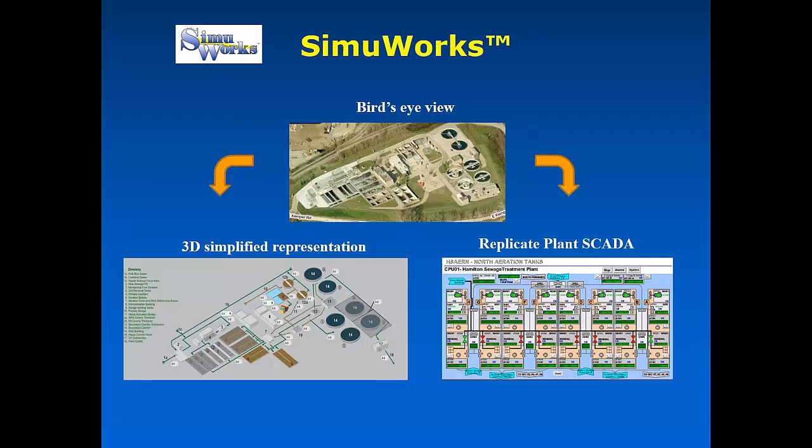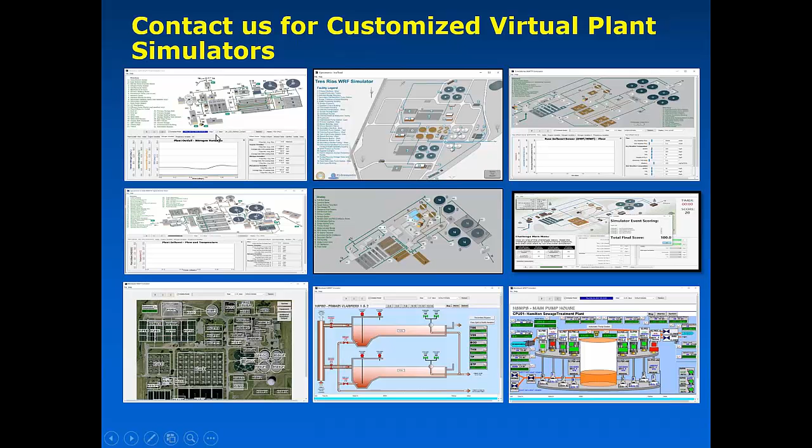So for those of you that have those questions, just reach out to us, send me an email, send our support line an email, and we'll be able to talk to you and your plant management. It can be done both for the bird's eye view of the plant, and we've also had folks that have been interested in just replicating the SCADA system. It's the exact same thing. In the same way that you run your SCADA, you click on it, you make your changes, we're also able to provide this simulator in that form as well. And these are just different types of the simulator that have been done for different plants across the country. Some of them in SCADA view, some of them in bird's eye view form, all of them customized to whatever that plant is interested in. And I can follow up with any of you that have questions around that.